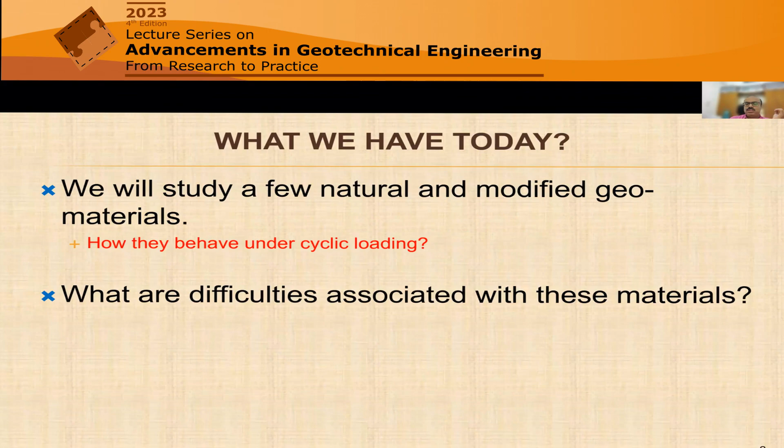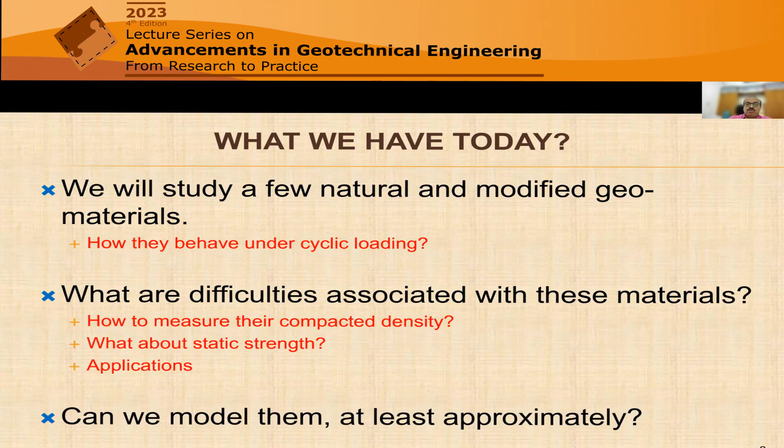We'll study a few natural and modified geomaterials, how they behave under cyclic loading mostly, and then what are the difficulties associated with these materials. For example, how to measure their compacted density, how about the static strength of those materials, their applications and how difficult it is to apply them, and can you model them, at least approximately. That's what we have today.

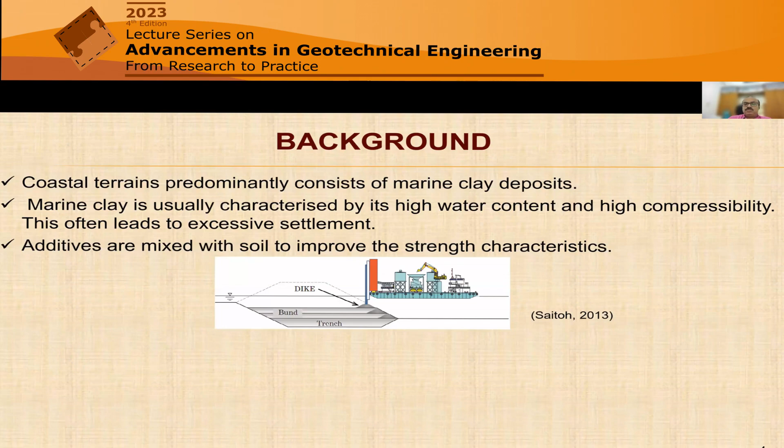So we start with the simplest among all, the natural and cement treated marine clay. As we all know, coastal India and many parts of the world are thick and thin with marine clay, characterized by high water content as well as high compressibility. To reduce this compressible nature or to gain strength, sometimes we do cement treatment. Now, once we do the cement treatment, it was kind of an assumption that it is fine against any kind of earthquake or wave loading.

But if you see this particular case, which is a dike in Japan, constructed over cement treated soil, basically DSM columns, deep soil mix columns, it got some kind of significant damage during the 2011 Fukushima earthquake. So it may not be ideal or appropriate to assume that just cement treatment is fine for any kind of situation under dynamic loading.

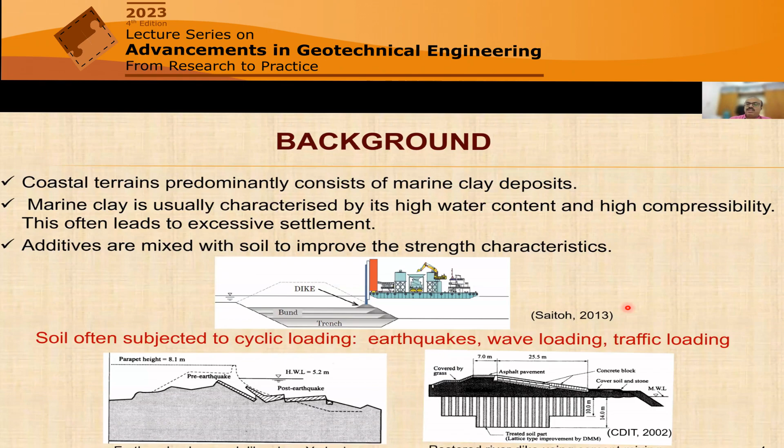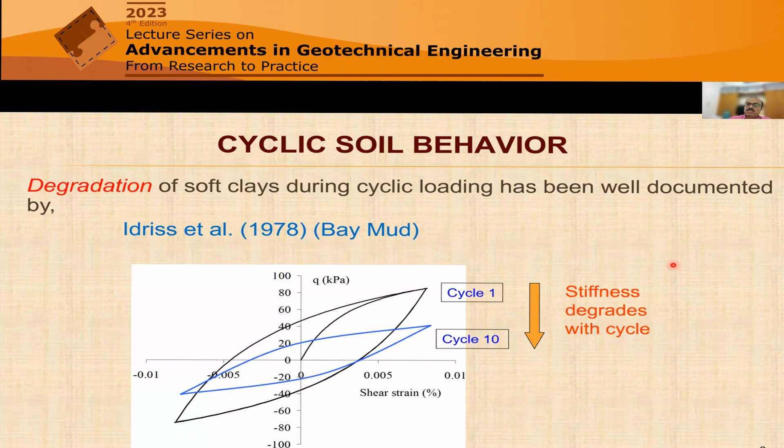Now, before critically examining, let us see what we know. We know that soft clays have a nonlinear stress-strain relationship. At the same time, its stiffness degrades with cycles. So if you go on increasing the number of cycles from the first cycle to the 10th or so on, its stiffness reduces. These are all very well-known facts. This is also another well-known fact, or kind of a design protocol: normalized shear modulus generally reduces with strain, and damping increases with strain, for obvious reasons.

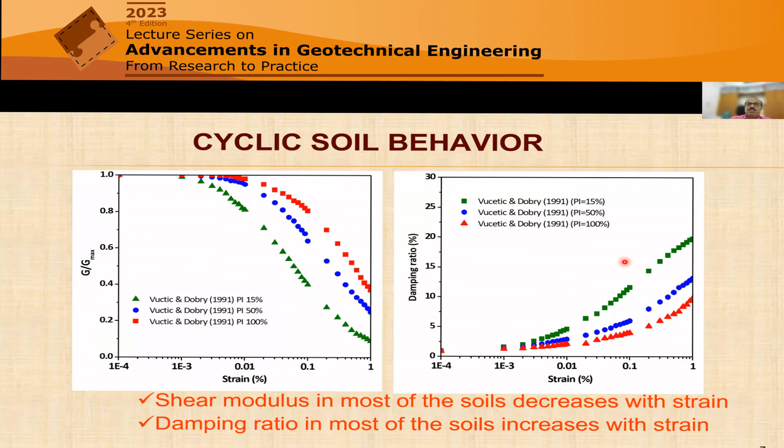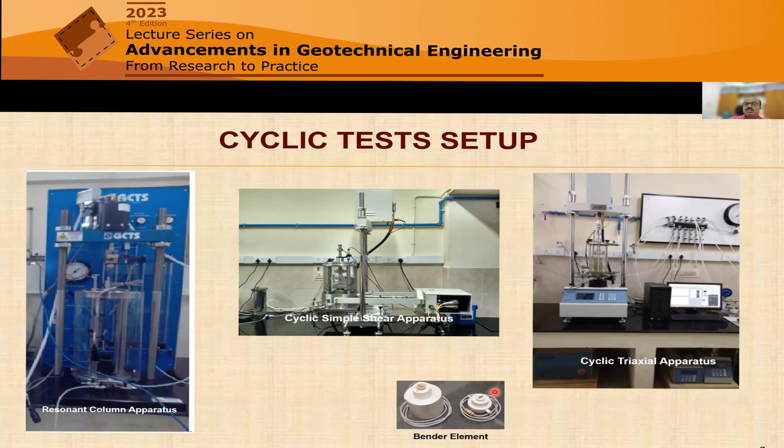Now, how did we establish all those? These are the equipment which we have in our IIT Madras. There's a resonant column apparatus, which is for the very medium to small strain range. Then this is cyclic simple shear, and this is cyclic triaxial. Cyclic triaxial and cyclic simple shear are ideal for medium to high strain range. The only difference is that in cyclic simple shear, we are able to see the actual principal stress rotations, whereas in cyclic triaxial, we will not be able to do principal stress rotations. Of course, all the machines are fitted with Bender elements, which measure shear modulus under very, very small strain range. So these are the weapons, if I call them, needed to analyze all these studies.

Now, if we directly go to the study, the experimental program which we carried out at IIT Madras a few years back, it's with varying cement content. The soil, the clay, will be mixed with varying cement content starting from 0, meaning pure clay, then 2.5%, 5%, 7.5 to 10%. Then we vary the frequency of loading. We vary the strain, studying from small strain to quite high strain of 1%. We fix the number of cycles at 100, then confining pressure.

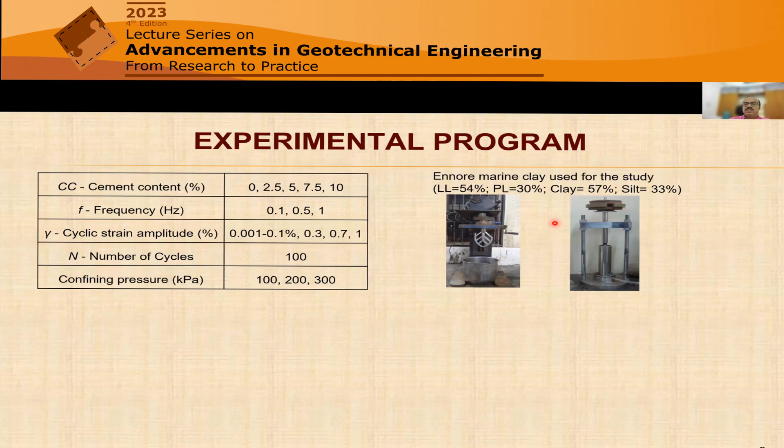We used our locally available marine clay with 54% liquid limit. Roughly, it's quite compressible in nature. Then the first thing we did was the ground preparation.

We varied the cement content and ran resonant column tests. As expected, increasing cement content increases shear modulus. Increasing confining stress increases shear modulus. Increasing curing stress also increases shear modulus. These are all known facts, but this confirms that our sample preparation and testing conditions are appropriate.

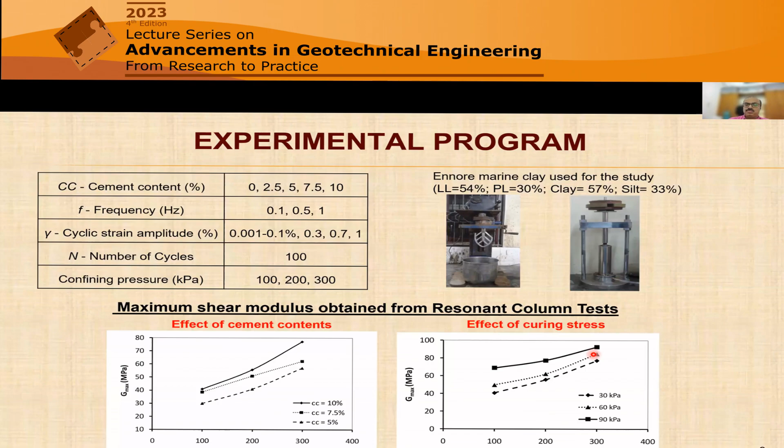In cement treatment, there's a reduction in degradation behavior, but it's not negligible. It still shows very significant degradation even in the cement treated soil. So the assumption that cement treatment is a cure for all may not be correct.

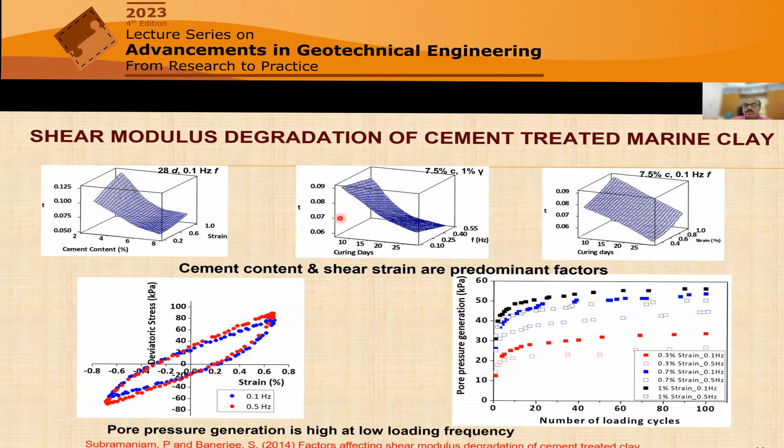We studied how frequency of loading plays a role, including the pore pressure response. Looking at deviatoric stress by strain, the red points are 0.5 hertz and the blue points are 0.1 hertz, very slow. Comparing pore pressure development at 100 cycles, there is clear pore pressure development.

Take any strain level, like the bottom one: solid points correspond to 0.1 hertz, hollow points correspond to 0.5 hertz. The 0.1 hertz, lower frequency, leads to higher development of pore pressure, consistent across all strain levels. At 1%, the highest strain, the solid black point is at the top while the hollow points are lower, confirming that lower frequency causes higher pore pressure development.

The reason is that at lower frequency, the sample sustains the load for a longer duration, slowly going down and slowly going up. Under undrained conditions, the sample experiences the load for longer compared to higher frequency loading. This is one important hypothesis from this analysis.

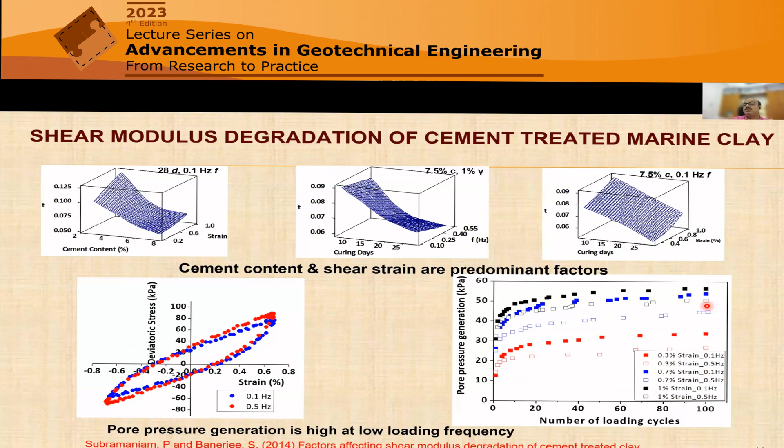This has direct application in liquefaction. People have already noted that under low to medium frequency earthquakes, the chances of liquefaction are greater because the development of pore pressure is more. It's similar logic to that phenomenon.

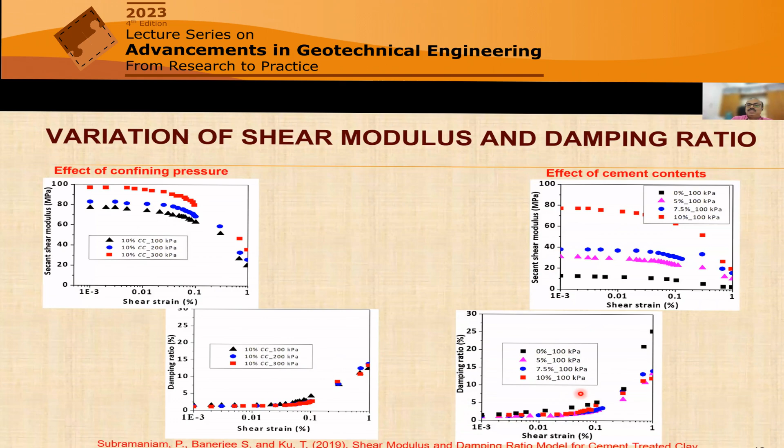We then checked different conditions with higher confining pressure and higher cement contents. Confining pressure has a quite significant effect on the modulus, but it doesn't make much difference in the damping ratio. We see a similar pattern with cement content as well.

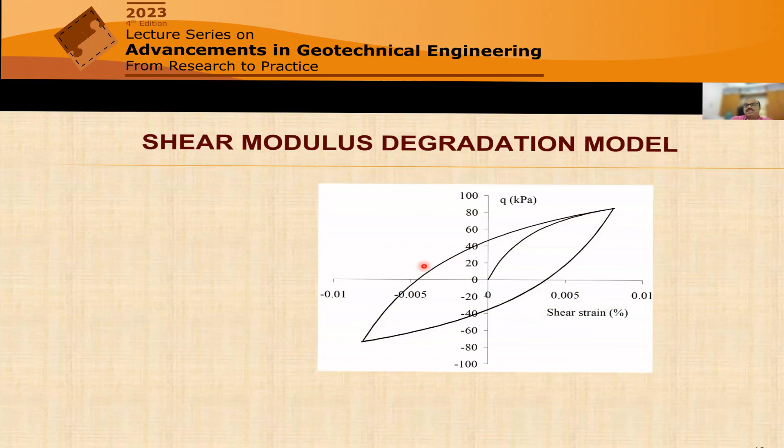Now, with that idea, we try to come up with a simple constitutive model for cyclic loading in clay. This is the idealized hysteretic behavior, and this is the hyperbolic backbone curve, which just follows a hyperbolic equation. The cyclic behavior is modeled using the Masing rule. So from the backbone curve, it goes to first loading, then first unloading, and first reloading. For first unloading and first reloading, we followed the Masing rule, which is very common for metals.

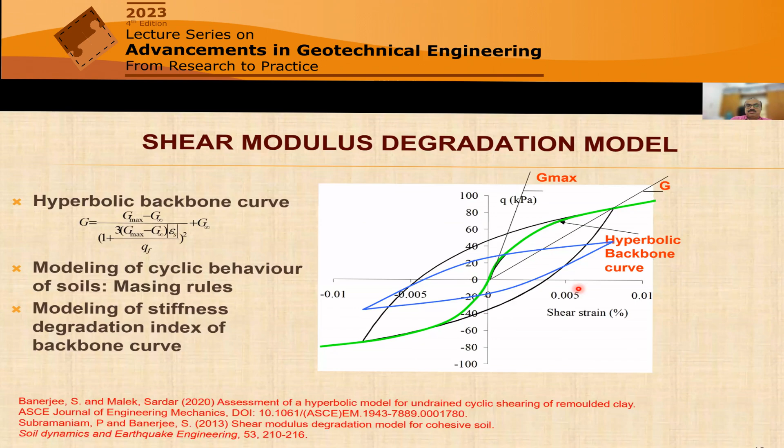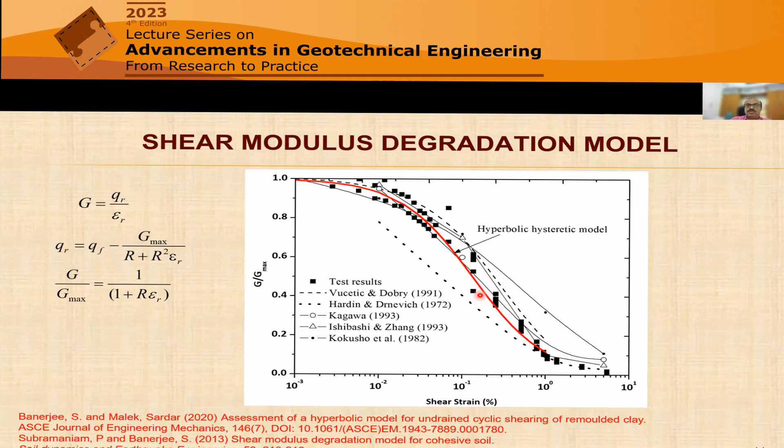So again, we kept studying our degradation behavior. We saw, as in that 3D plot, that the degradation is a function of strain, PI, over-consolidation ratio, and frequency. If we come up with those formulations and do a simulation to compare with experimental data, of course, to make ourselves confident about our model, we didn't choose our own data at all. We selected well-established data with varying parameters, and used the computed equation as per our development, and it matched fantastically. We were more than happy. In fact, we used 3-4 different sets of data reported by Professor Vucetic, and we saw that our model gets very positive results.

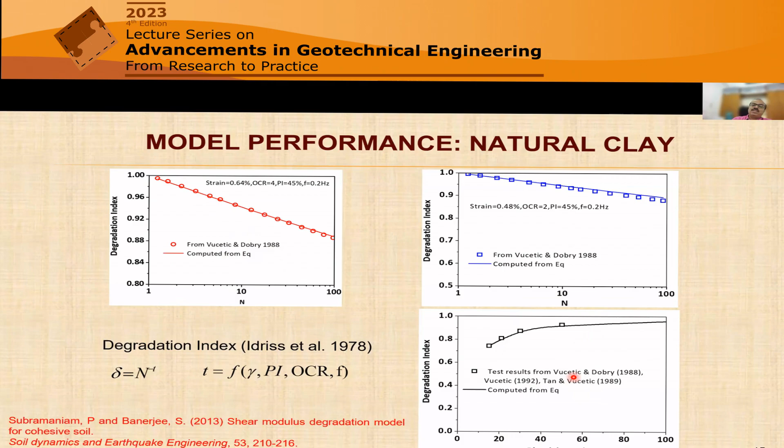So this is for the natural clay. With that idea for natural clay, we ventured into cement-treated clay models, and we saw that apart from the regular factors for natural clay, for the cement-treated system we have to add cement content as well as curing days as two governing parameters. Then we compared the experimental data with our predictions. Of course, you won't get results as good as in natural clay, but still, I would say we are generally happy with the performance, if you ask me.

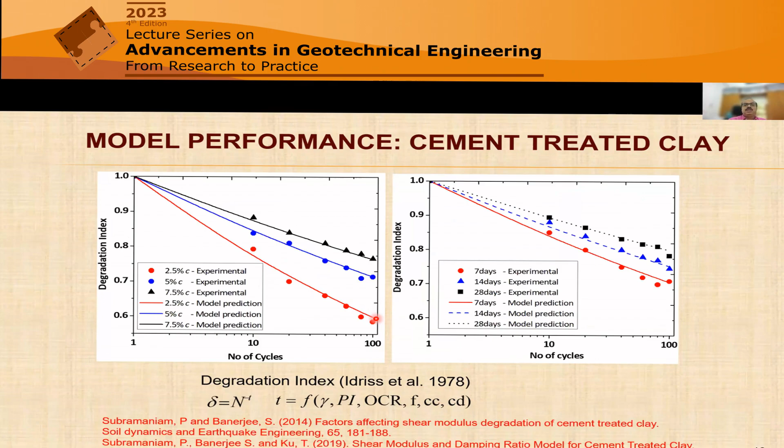What about the contaminated soil? That means so far we have seen pure clay and cement-treated clay. Now if we add some kind of pore fluids, if we change the pore fluids, how is it? We can do many things, but we just used sodium chloride. Actually, we tried calcium chloride also, but I'm not sure, some problem happened because of the corrosive nature of the CaCl2 in our equipment.

But with sodium chloride solutions under different confining pressure, because of the development of the diffuse double layer with pore fluid with sodium chloride, the general stiffness is more, the shear modulus is more. But one thing we noticed is that the degradation, the nonlinearity with the change in pore fluid concentration, changing from 0.4 molar to 1 molar solution, is even more significant. You see there's a sharp decrease in the modulus as you keep increasing the shear strain. So that's one of the things we noticed.

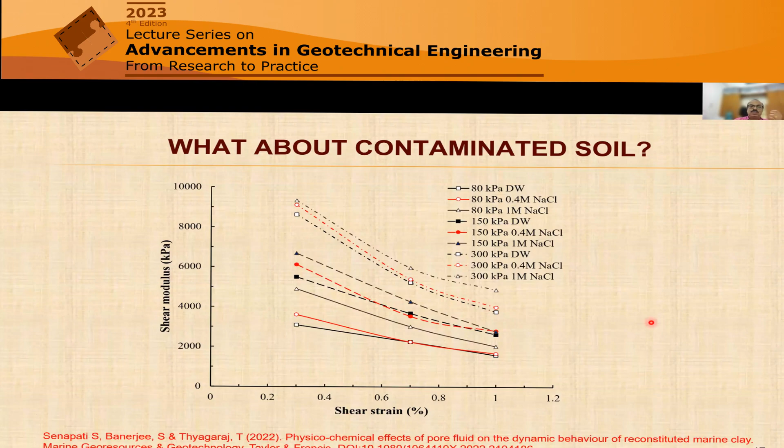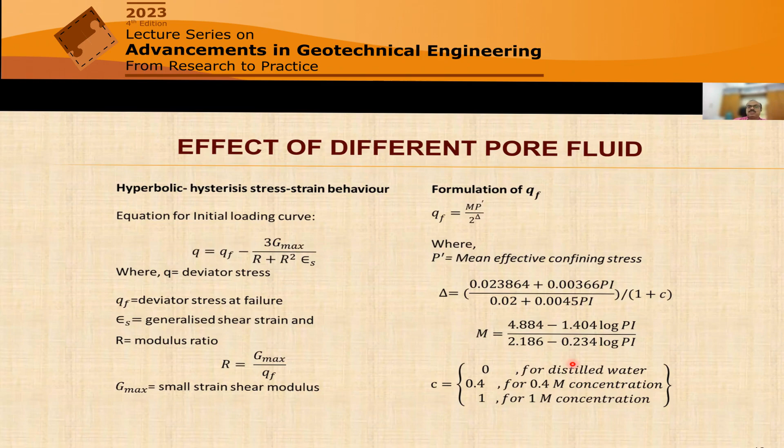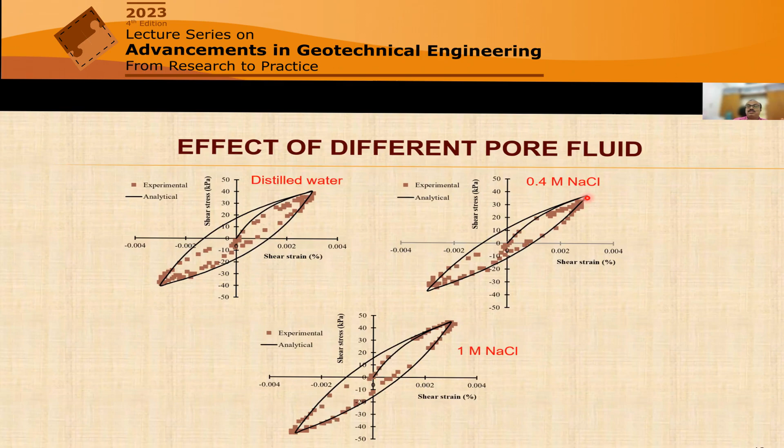One of the questions we always ask is, we are doing all kinds of things in the isotropic situation, but in the field it's actually anisotropy. It is not material anisotropy, it is stress-induced anisotropy, I would say. So in our triaxial system, we keep on first consolidating the soil under an isotropic condition, and under that anisotropic K line, we apply the cyclic loading.

Now, how to choose the anisotropy? That was a key issue. So Kc equal to one means basically sigma 3 is equal to sigma 1, which is isotropic. Then we choose 0.55, the absolute K0 condition, and in between 0.67. You cannot go less than 0.55 because that's less than ideal. Less than K0 condition is more like an active earth pressure condition, and we are not studying any active condition in the soil. Our analysis boundary is within at rest.

Now with that, we try to study the degradation. We did a detailed study, but here I've shown you the degradation part. The red line is for isotropic, the blue line is for Kc equal to 0.67, and the brown line is 0.55. You can see the degradation is very significant if you are talking about higher stress-induced anisotropy. It's even more complicated and interesting at lower frequency, and with higher strain it is very significant as well.

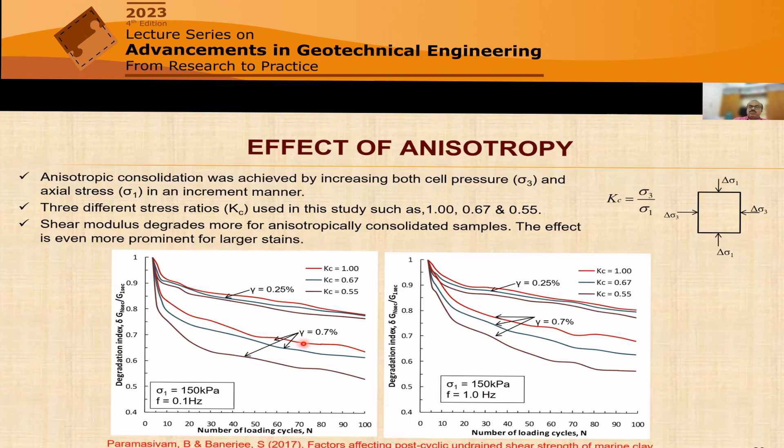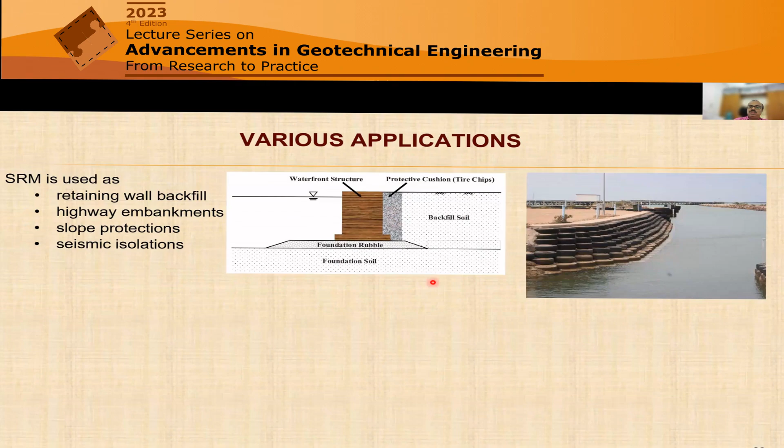So with that, we'll go to the next part of the lecture, where we deal with particulate rubber sand mixtures. We all know SRM can be used for various applications. It's generally used to reduce active pressure behind a wall as a protective cushion, for shore protection, or as a lightweight backfill. Previous studies suggested it's a lightweight material, has low liquefaction potential and high damping ratio, so different applications, and recently it's used as backfill for pipe materials.

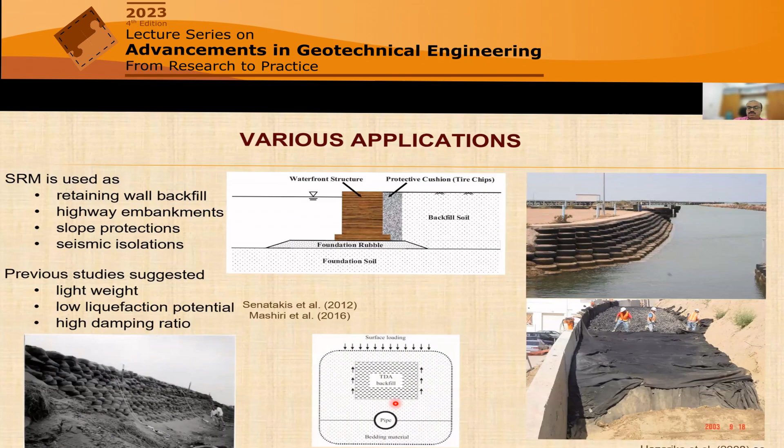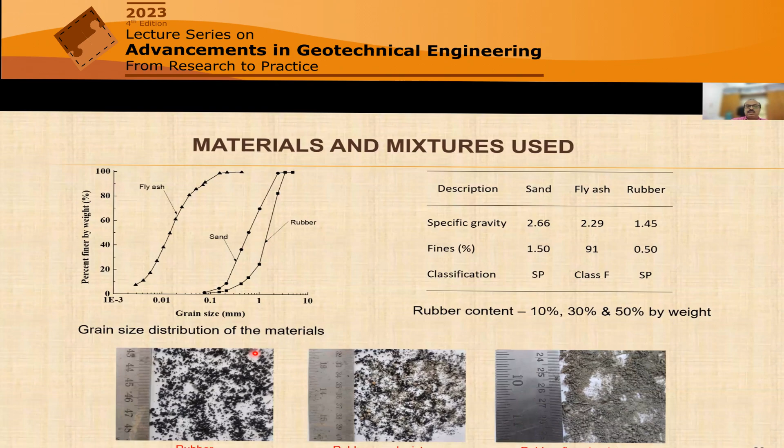So we try to do that. We started this work a few years back and are still doing it. I'm not saying we've concluded, but we're still working on it. If you compare the rubber, it's a little coarser than the sand, and it's more or less uniformly graded. This is the typical figure.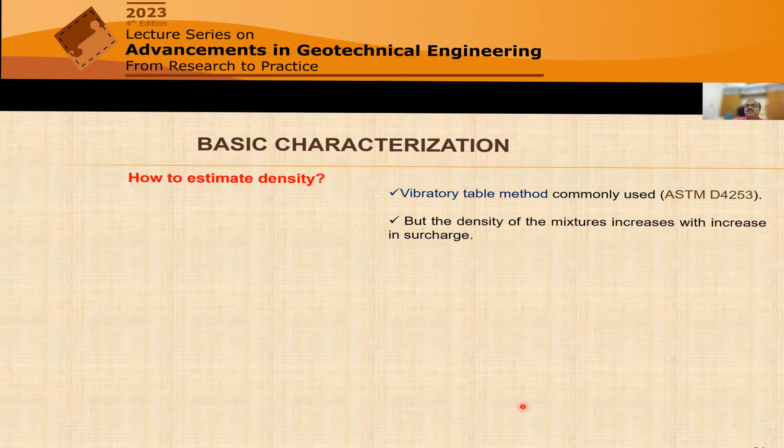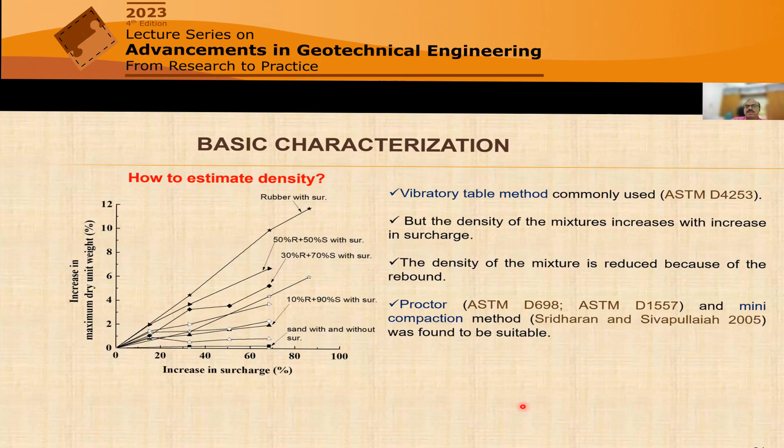Then how to estimate? The first problem we encountered was how to estimate the density. The regular vibratory table which ASTM suggests doesn't work, because the density of the mixture increases with increase in surcharge, and if you remove the surcharge at the end, the density immediately reduces because it tries to dilate out, meaning volume expansion happens. So what is the best method? That's the first question. We tried Proctor, and then a mini Proctor — the mini compaction proposed by Sridharan back in 2005, a classic geotechnical paper. It seems the mini Proctor is kind of ideal.

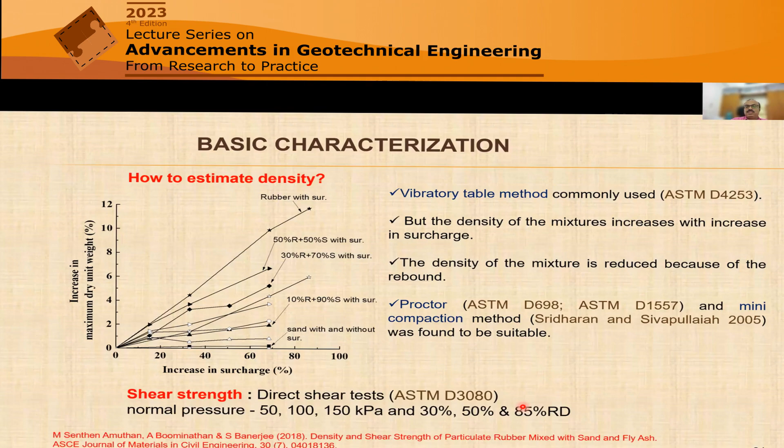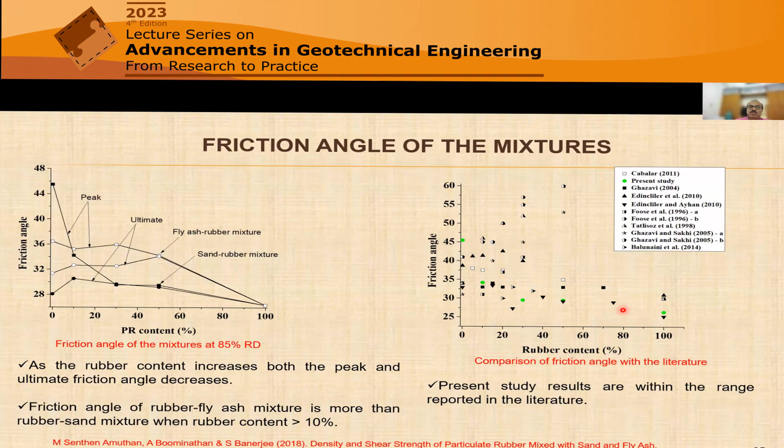Before going into that, we did a bit of microstructural study on this rubber-sand mixture, and also benchmarked it with fly ash. We saw that particulate rubber has a high rough surface because it's shredded in a workshop, so it's not very smooth. The interaction between rubber and sand is much less compared to rubber and fly ash. In fact, we did a follow-up study with direct shear using rubber and fly ash instead of rubber and sand, and there the reduction in friction angle was negligible.

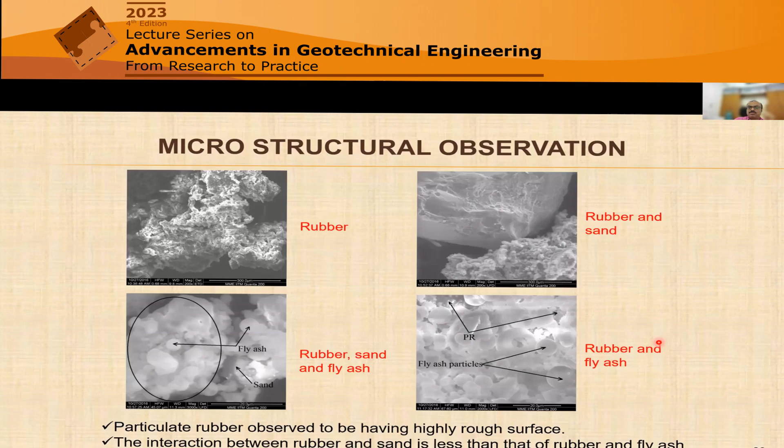That's something we haven't studied in detail, but we'll study it in future. For your information, if instead of sand you use fly ash, it's actually not bad, because fly ash particle size is small, so it nicely fits within the rough surface of the rubber. That's why the interaction with fly ash is much more compared to the interaction of sand with rubber.

So with basic understanding of its material engineering properties, we thought whether it can be used for base isolation technique. Now you may wonder, what suddenly is base isolation?

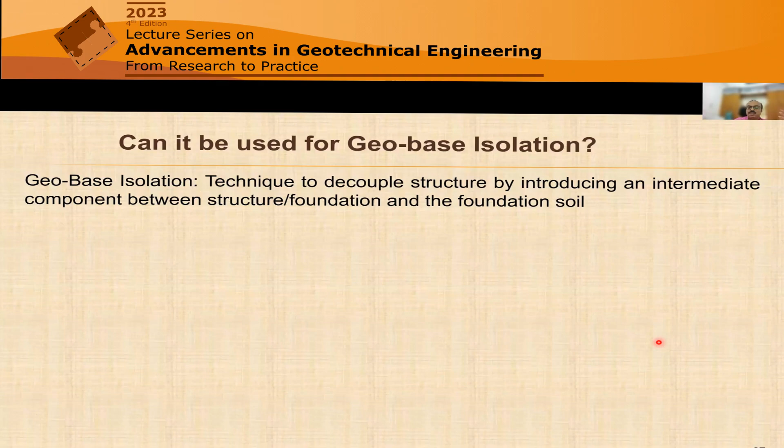Base isolation is basically two parts. One is you want to lengthen the natural period. So if you use it as a backfill material below a building, you want to increase the natural period, because it will reduce the base shear, for obvious reasons.

But the problem is, as you increase the rubber, the bearing capacity reduces. That means the angle of internal friction is reducing. You want to damp out the vibrations so it reduces displacement. The deformation has to be reduced because your material is not strong enough anymore.

So you have to balance it. Lengthening of natural period is a positive side. If you reduce the friction angle, your strength is reduced, so the natural period of the medium increases, which is good. But as you make it softer, the structure on top will deform more. To reduce that, you have to have high damping. The rubber kind of provides both.

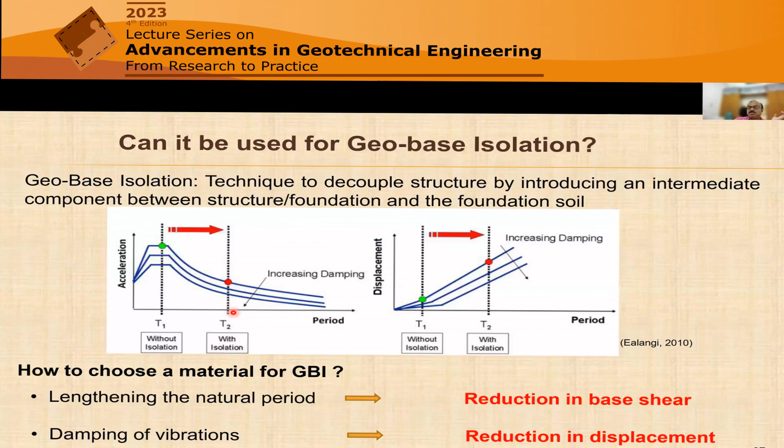If you see the peak friction angle, from the deviator stress in the same direct shear test, you see that it reduces at 10%, 30%, 50% rubber content—a very significant reduction. As the peak strength reduces with increasing rubber content, the period lengthens, and at the same time you get an increase in damping.

Now, damping in rubber—why is it increasing? Damping in rubber actually has two components. One is coming from the friction between the particles, as well as the rubber. Now you have to imagine it's not like sand.

The rubber is a deformable material, so rubber is actually deformed. So at 10%, 30%, 50%, as you keep increasing the rubber, the damping is coming only from the deformation of the rubber, not from friction. But when you have 0% rubber or a very small percentage, the majority of the damping is coming from the frictional component.

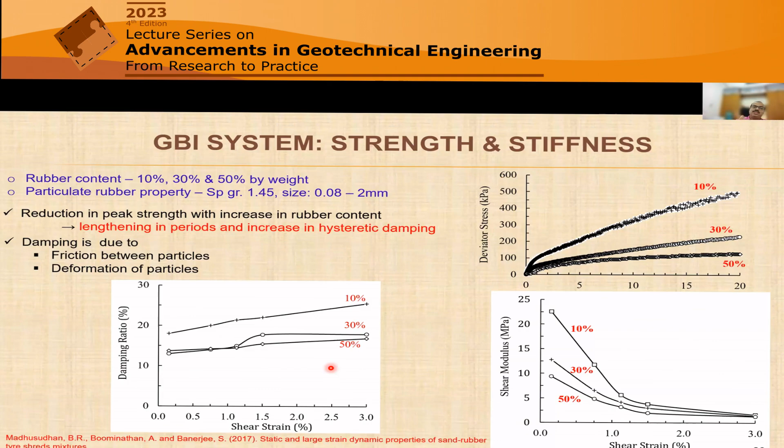Now what we saw here is that the 10% to 30% mixture is ideal, where you get the optimum friction angle as well as the optimum damping. Between 10 to 30% of the rubber replacing sand, you get the damping component both from friction as well as from the deformation of the rubber.

So now we try to apply that in actual field cases—we start with the lab, then we go to the field. But the question we always ask is, what is the static stability? Because we've already established that with SRM the angle of internal friction reduces, so static bearing capacity reduces, and settlement is expected to be more. Why not use a geogrid layer to control the settlement?

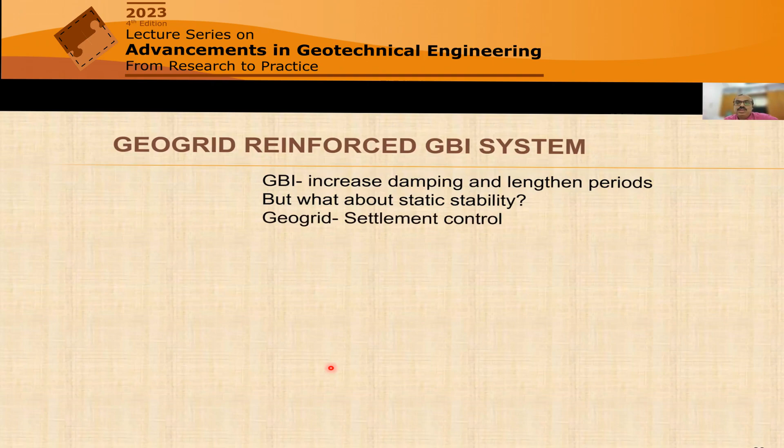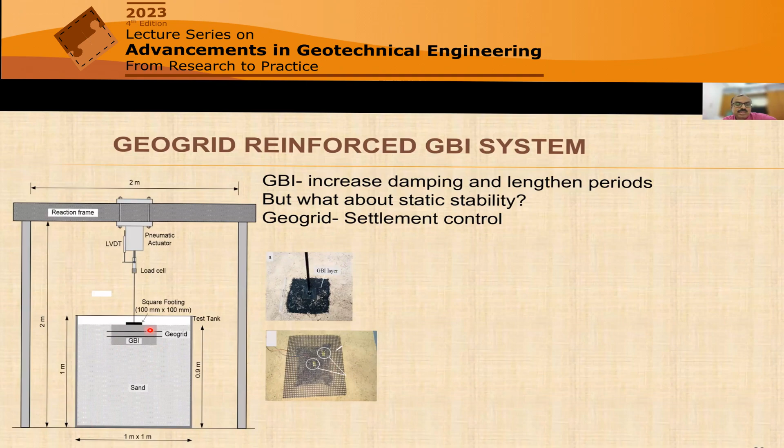So basically we came up with a simple lab test where you have the natural soil, and this is the GBI, that means the sand rubber mix, and it is reinforced with a couple of layers of geogrid.

If you do that, you see this is the pure sand. Obviously, if you don't have a geogrid, the settlement will be much more. But as you increase the layer of geogrid—single layer and double layer—you get adequate bearing capacity with reduction in settlement.

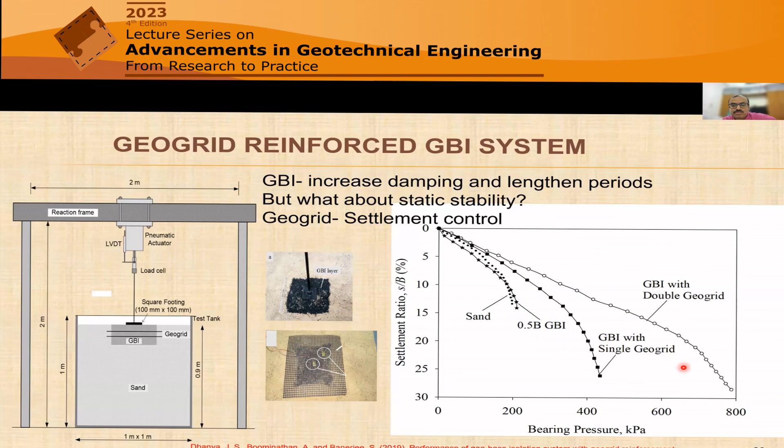So now what about the numerical model? We did the numerical model of the same thing, and applied earthquake excitations in the numerical simulations. As you can see, the seismic settlement part also shows the same thing.

This is with GBI and this is without GBI. Without GBI settlement is slightly less because it's pure sand. With GBI but no geogrid is the red one, where you see that since you've forcefully reduced the angle of friction, the settlement is more.

But as you keep increasing the number of layers of geogrid, you get very little seismic settlement. In fact, we have seen that the two-layer geogrid is enough, because there is no significant increase between two layers and three layers. So reinforcement with two-layer geogrid is perfect as per our study.

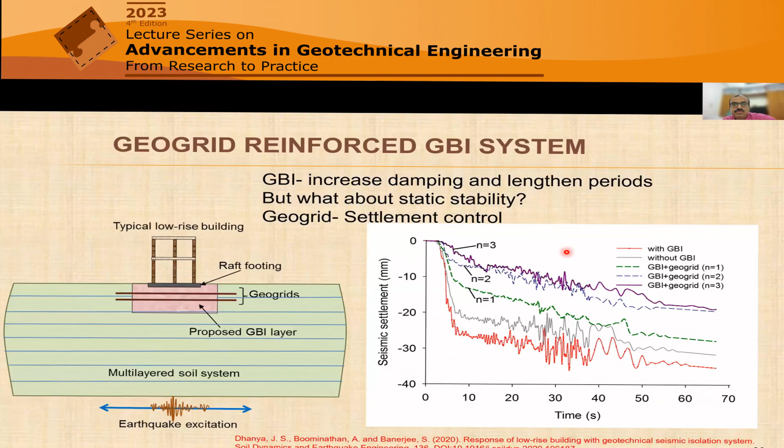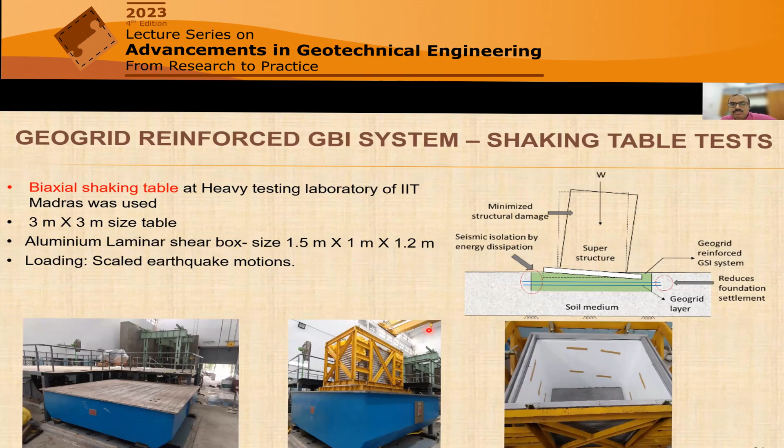So now we did the shaking table test to confirm our hypothesis. This is our IIT Madras heavy testing lab, where we have a 3 meter by 3 meter shaking table, on which we mount our laminar box of 1.5 meter by 1 meter by 1.2 meter, and apply a scaled earthquake motion. The soil is here, then we put our GBI with geogrid layer, and created a scale model of the structure.

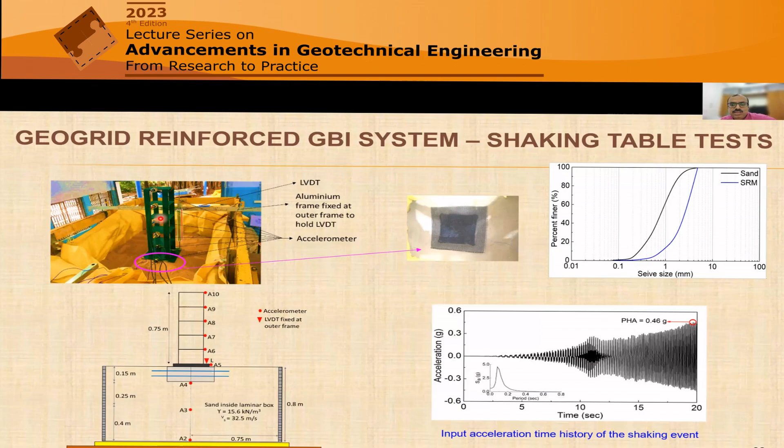It's a multi-story structure. We varied different things. I'm just showing one typical picture, and then we have the input accelerations.

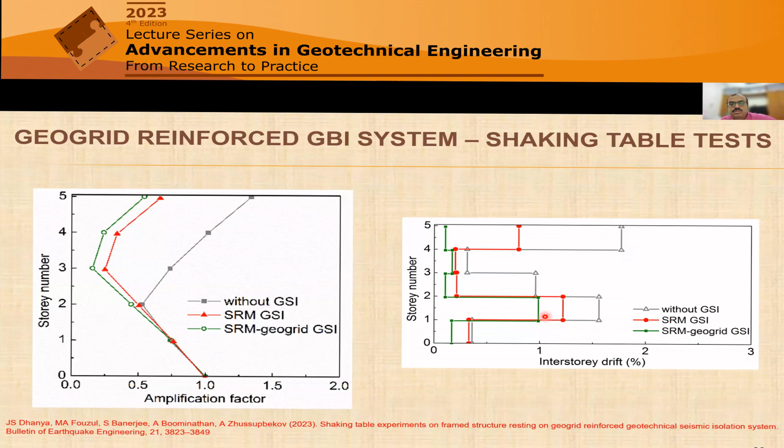Here also, same thing, it's an interstory drift. You see without GSI, we are having close to 2% interstory drift. But as you keep on adding the SRM geogrid, it is reduced below 1% interstory drift, which is within the prescribed limit.

Now, with the scale model done in the lab, we transfer that to the field. So how are we going to do that? We studied the ground vibration propagation in the field.

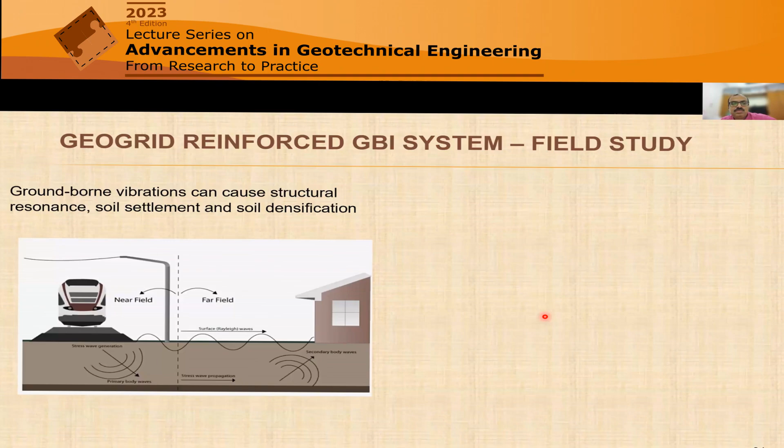This is the concept which earlier people used. We saw a paper in 2018 published on the rigid block isolation system, where you prepare a concrete block. That idea gave us the energy distribution concept, but here the energy dissipation of the material damping is ignored—it's just a rigid barrier system.

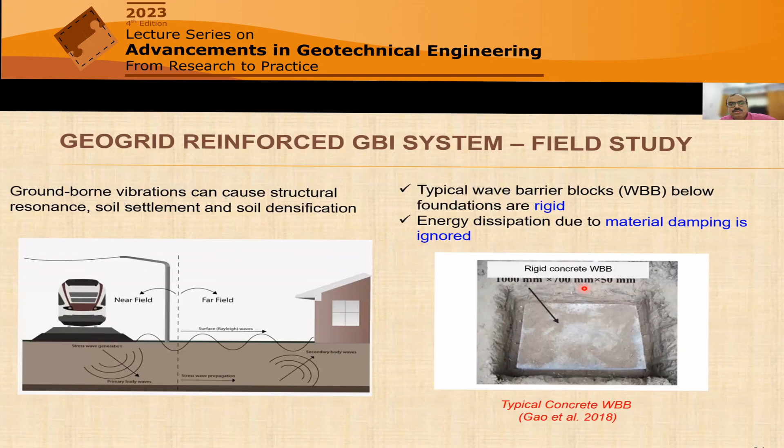But we thought, why not use the SRM instead of this concrete block? So what we did is there is a ground wall—this is the layer and this is the vibrating block—and we measured how much the wave is transferring with and without our proposed GBI system.

So we chose a site near Chennai, a typical industrial zone with a lot of compressors, generators, and parts of a power plant. The city administration proposed to construct 3 mid-rise building complexes at the site, so ground vibration is expected to be a problem during construction.

So we started studying the feasibility of a GSI bed, and this is the typical soil profile. As you can see, the top layer is loose sandy soil, which can easily carry vibration further. That's how we proceeded.

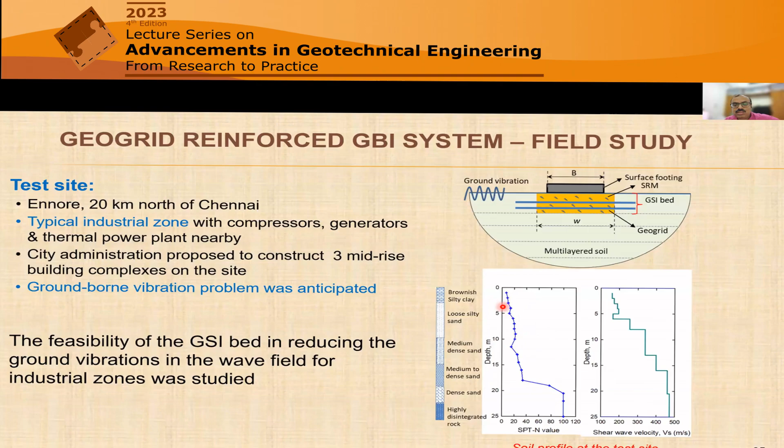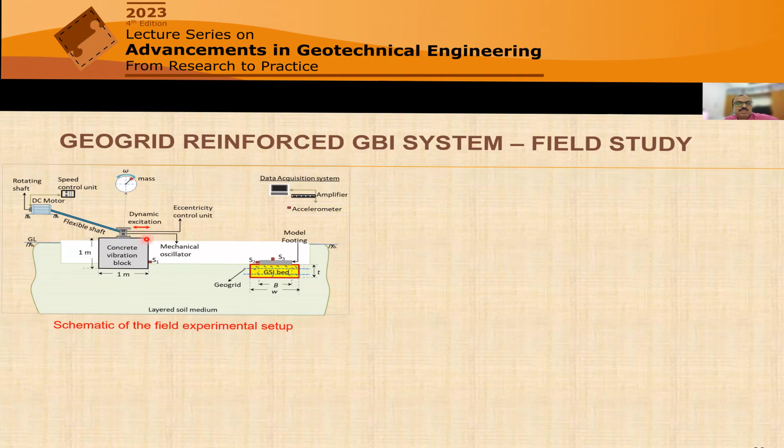This is the concrete block where we create the vibration—a typical setup, same as the block vibration test. Then we constructed the footing on the GSI bed and heavily instrumented it with accelerometers on top and on the sides, a series of accelerometers. Then we created vibration with and without the GSI bed.

So this is the typical case—the block vibration setup, where we operate different frequencies and excitations to come up with the maximum influence. This is the GSI layer, and this is the typical footing.

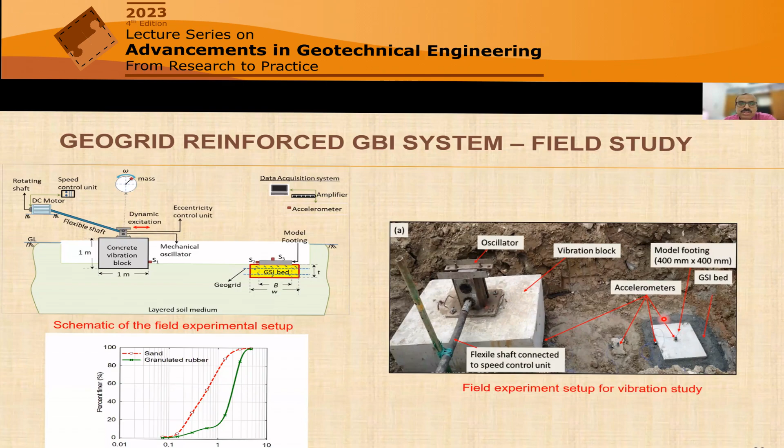We tried to model the same thing numerically in Abaqus. So this is the excitation, this is the model footing, and this is the vibrating block.

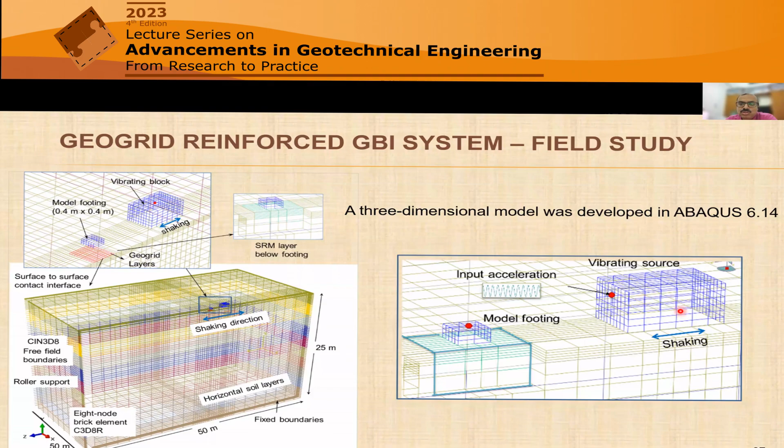If you see the enlarged view, we are monitoring the acceleration on top at these red points, and this is the vibrating source. We applied shaking in these directions, and then we saw very interesting results.

We saw—okay, before that, how to model the SRM. What is the material model? We used the hyperelastic model, and did a cyclic triaxial test and a normal triaxial test of this SRM system, using the hyperelastic model that's used for elastomeric bearings and rubbers.

We saw that it's not bad—it gives hyperelastic behavior. We did further triaxial test simulations in Abaqus, which also gave similar results, so we are fine—it matches the experimental data. The numerical model is, to some extent, correct. It may not be perfect, but it's not way off either.

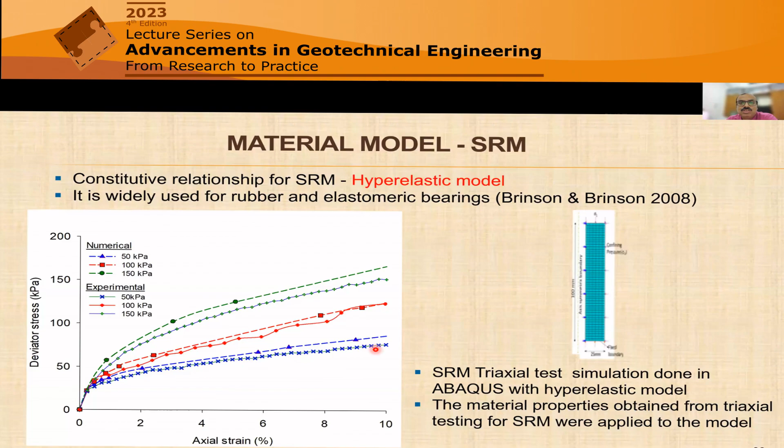So what we saw here is we started from the lab scale, then modeled that numerically, then went to the shake table, then finally translated it to the field. So all three aspects we have studied in this particular case.

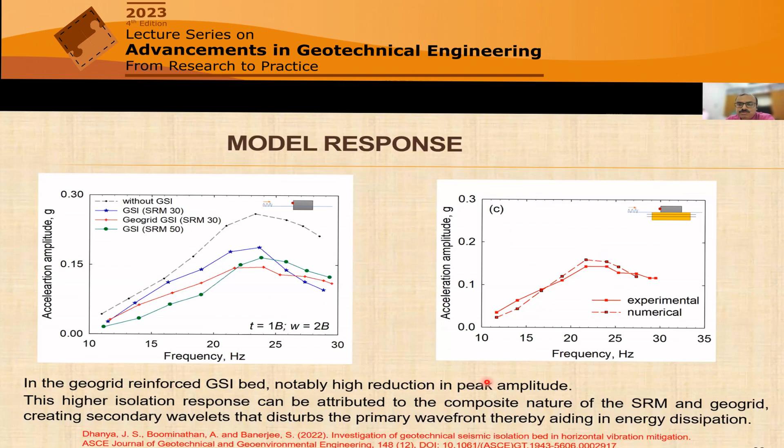So what about the liquefaction resistance? Just a few slides—I will conclude my lecture with liquefaction behavior and how it can be used. We are just casually doing this study, and we're going into detail. I'm not—

Macro behavior is favorable for decreasing liquefaction potential - we can see this macro behavior. But if you look at the micro behavior, we did a lot of work, though I'm not showing those results here. We did a goniometer study, a particle-water interaction study, showing that the rubber has a hydrophobic nature. So the permeability actually reduces as you increase the rubber content, meaning that higher rubber content makes the mixture less permeable. That's again not good for countering liquefaction potential. So on one side it's favorable, on another side it's non-favorable, but quantitatively, which one plays the major role? That's the critical question, because overall in macro behavior we've seen pore pressure development is less with a large amount of rubber. So that's what we are now working on.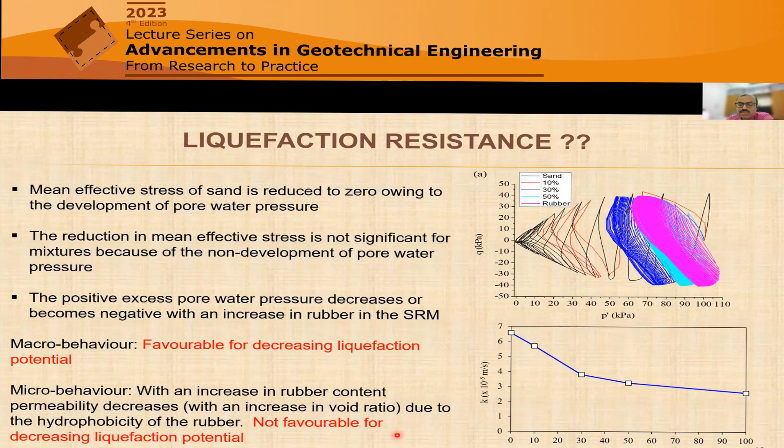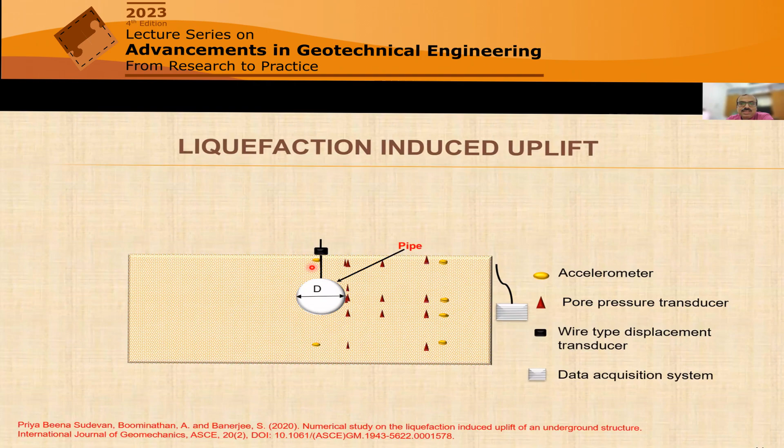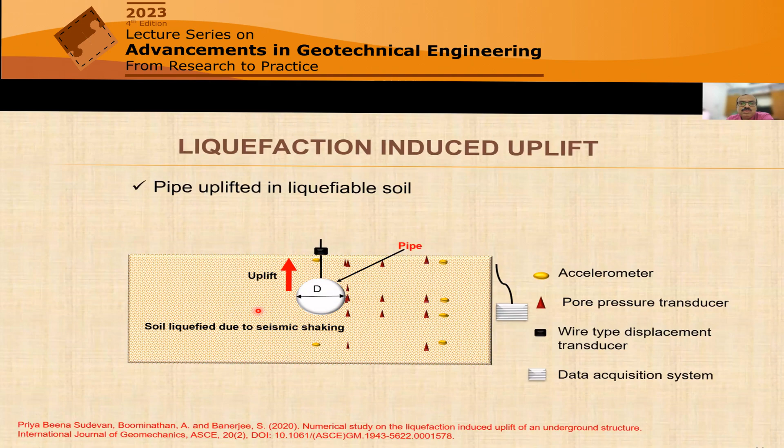Before I conclude, a couple of slides showing an application we've started. You see this is a pipe, and when you apply an earthquake, what happens if this soil gets liquefied? The pipe will be lifted above and reach the ground - this is liquefaction induced uplift. There are several methods to counter it. One method is to replace the soil with a highly permeable SRM layer, a sand rubber mixture. What happens is, in this part, there will be no pore pressure development because the water will immediately come to the surface, so it will not create any uplift to the pipe.

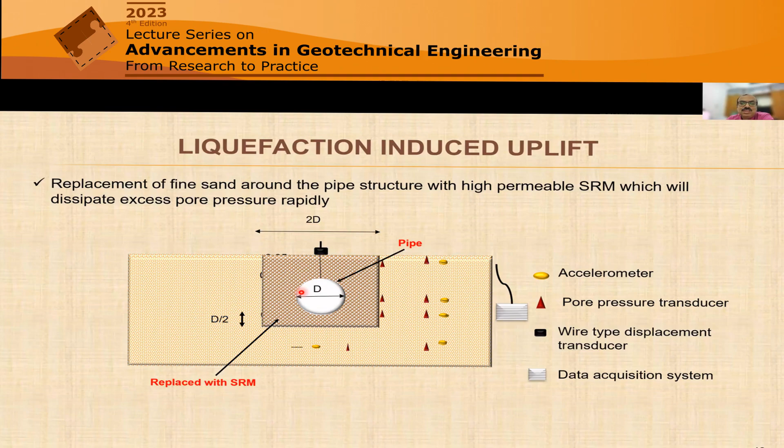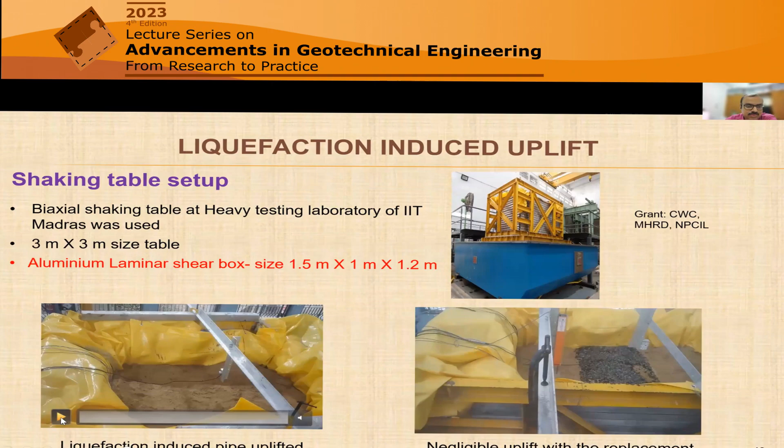That was the hypothesis, and we tried to test it in the shaking table. Let me see if I can play this video. So here, if you see, this is without any SRM. Soon you'll see that in the top part of the soil, as the shake table shakes, there is a quick crack in the soil - liquefaction happened, and then there is uplift. There's a PVC pipe inside, and you'll see the PVC pipe come out. You can see it clearly now - the PVC pipe came out, because the top layer is completely liquefied.

Now, if you see the other case, where on top of the PVC pipe I've replaced the soil with this drainage layer - a highly permeable sand rubber mix - you'll see that the water will come up, everything happens, but there is no crack in the layer and no pipe uplift occurring. We quantified this with strain gauges and LVDTs, though I'm not showing that data, but apparently it works at small scale in a shake table test.

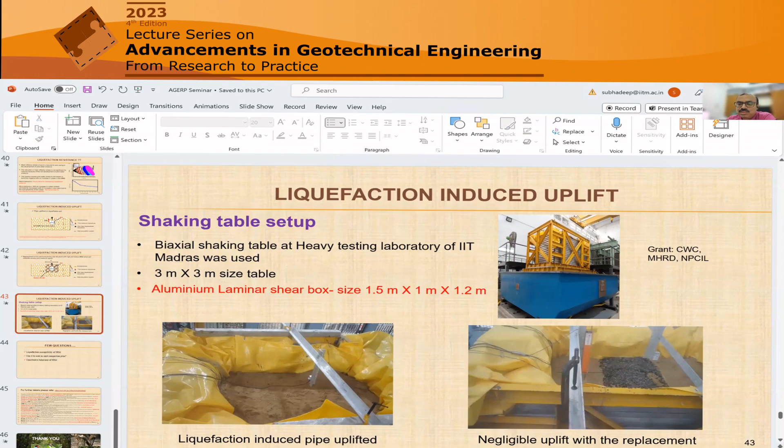So that brings us to the end of this lecture. I'm not giving any conclusions - instead I'm posing a few questions which are still unanswered.

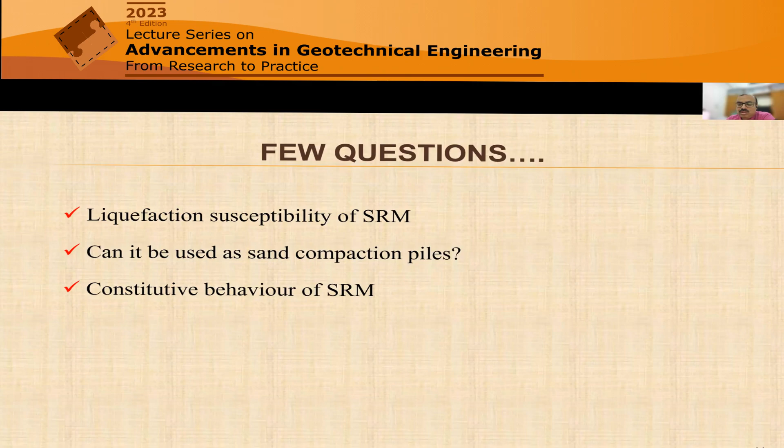As I said, liquefaction susceptibility of SRM is a question we have to address. Second, can it be used as a sand compaction pile, since sand is expensive - whether SRM piles can be used instead of SCPs. And finally, the holy grail of all these things is the constitutive behavior of SRM - whether we can come up with a comprehensive physics-based constitutive model. So far, whatever we've used is empirical to semi-empirical, or a phenomenological model, I would say. But whether a physics-based model of this sand rubber mix is possible - these are the questions I leave for the audience.

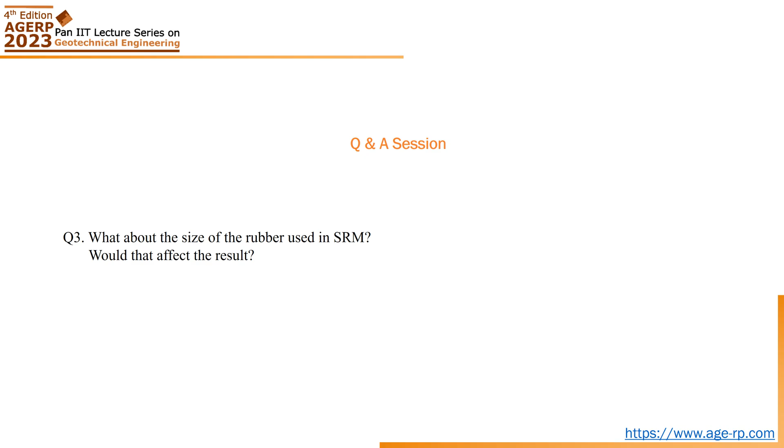No, all the studies we have considered are under fully saturated condition. So there is no problem with that, because we want to see how it behaves under fully saturated condition. So that's, I completely agree, that will be more critical, and all our study is that.

One of the things you may ask is the durability of those rubber under completely saturated condition. That is one of the things people are asking, and it is a study that someone has to do, which I personally am not capable of doing at this point, because I am not a chemistry or chemical expert in the durability part of it. So that's another issue which, before we use it regularly, we have to clarify with the relevant experts, I would say.

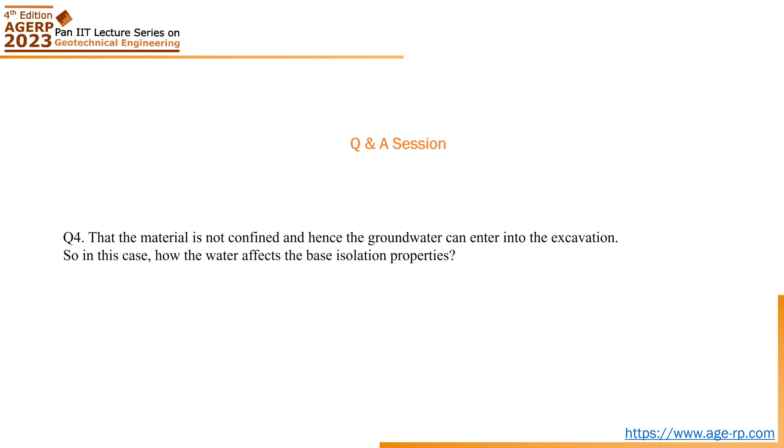Yeah, direct shear test you can trust because its behavior is like a cohesionless material. I don't think you can completely ignore that. But of course, we all know that in direct shear, you can't do it very accurately in the saturated condition. But normally it's a cohesionless material, it behaves like any cohesionless material. So that's fine with the direct shear. We have done all direct shear, triaxial, everything, but direct shear is okay, I would say.

Yeah, it's a good question. Actually, we haven't really paid much attention to the geogrid strain. We had a limitation here. You have to understand, because we are doing a scale model test, particularly at the lab level, we have to fix the scaling factor. Based on the scaling factor of the size of the model and the loading, we scale back and choose a geogrid that fits the scaling exactly. So we haven't really had a chance to vary the different geogrid and see the performance, like you said. It's one of the things we also have in mind, whether instead of having 2-layer geogrid, one layer is enough.

But one thing you should understand is the strength of the geogrid is one factor. Another thing that plays a major role is the layer of SRM confined between 2 layers of geogrid. In fact, we did the simulation to see that this is 1 layer of geogrid, that is another layer of geogrid, and in between the SRM is also acting like a reinforcement under confining stress. So with a single layer, we may miss that benefit. We have to see that, but that's again a hypothesis.

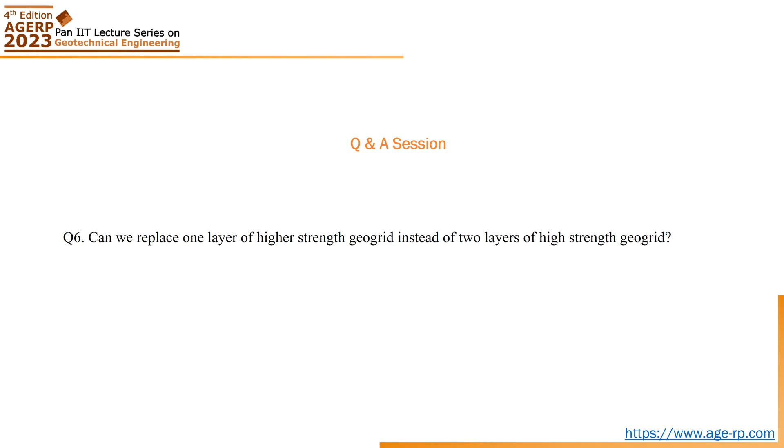Yeah, we have. So again, you are asking about degradation in terms of durability over time. That part we haven't tested, and again that has to be taken up by experts in that field, because I'm not the expert in that particular area. But what we saw in the literature, if you have rubber mixed with water, it generally doesn't lose its strength at ambient temperature, which is in the range of about 20 to 45 degrees. Beyond 45 degrees, there may be some effect, which we have not yet studied. But otherwise, the degradation, in terms of cyclic degradation in stiffness, is almost similar to that of any cohesionless material.